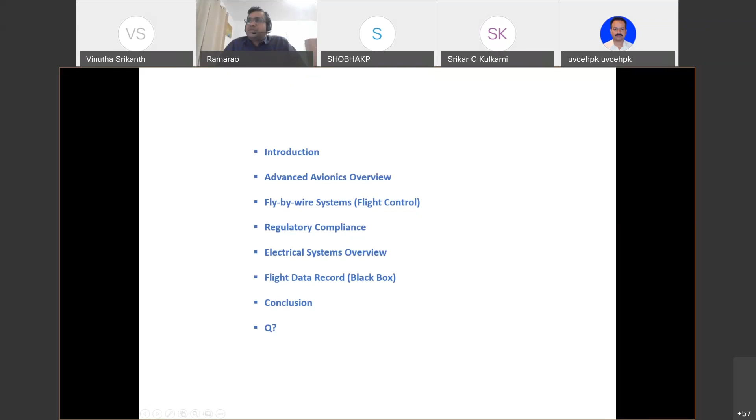Just I would like to introduce aerospace engineering, or flight. When I was supporting Boeing aircraft in the USA, whenever I entered the facility, I used to see the display board. I was curious what exactly was written on the display. I went and saw these words. I believe this will be self-explanatory with regards to the introduction to flight. So I would like to read it.

From prehistoric times, humans have watched the flight of birds and longed to imitate them, but lacked the power to do so. Logic dictated that if the small muscles of birds can lift them into the air and sustain them, then the larger muscles of humans should be able to duplicate the feat. No one knew about the intricate mesh of muscles, sinew, heart, breathing system, and devices not unlike wing flaps, variable camber, and spoilers of the modern airplane that enabled a bird to fly. Thousands of years and countless lives were lost in the attempts to fly like birds.

So as we know, we are all engineers. We need to develop a system in order to imitate the bird. It's very difficult for us to design an actual system, and we will face a lot of challenges. We have to bring down the real scenario and real requirements in the form of software and hardware. Just to bring a small piece of requirement to life, it takes a lot of challenges, and we have to put it on paper. A lot of logic is involved to bring up a huge complex system. An aircraft is a complex system, and it has subsystems.

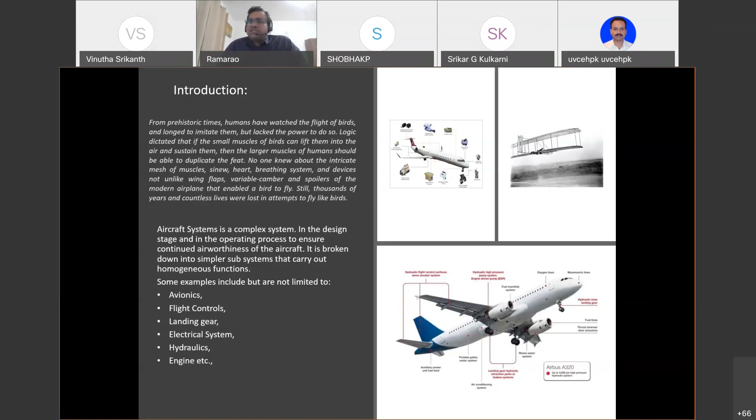If the aircraft is built in the US, we have to approach FAA regulations. So then I will move to the next slides. As I mentioned, avionics is one of the subsystems of the aircraft. As we know, advanced avionics systems can automatically perform many tasks that pilots and navigators previously did by hand.

If you go back to the 1940s and 1950s, we had a traditional way of instruments, where the pilot had to put 100% effort into navigation and the flight phases. But nowadays, with the extent of electronics and computer science, we have advanced so much that we are able to achieve the autopilot system in the aircraft. Where we have proper waypoints and plans, the flight itself will take over the automatic configuration, and it will provide less burden to the pilots.

So in order to avoid accident-prone errors, that is the motivation behind avionics subsystems. As we know, avionics are the electronic systems used on aircraft, and not only aircraft, but also artificial satellites and spacecraft.

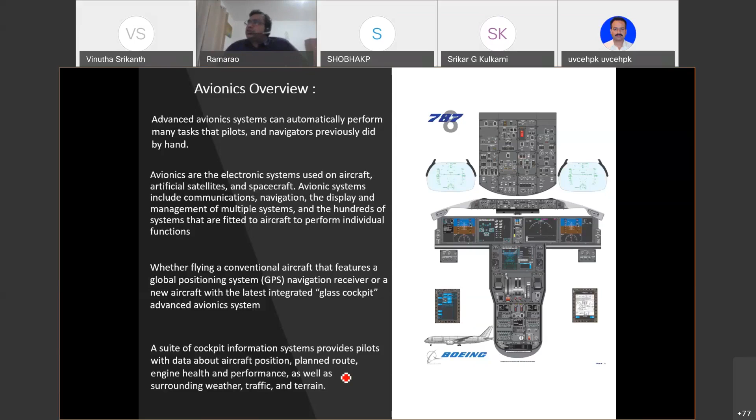As I mentioned, right now we have the capability of autopilot. Because of advanced avionics, we are able to achieve the autopilot concept in the aircraft. And not only in aircraft, right now we are seeing autonomous driving systems. Some of these things have been derived from the aerospace industry to the automotive industry.

The main heart of the avionics is the flight management system, FMS. So the FMS is the heart of the avionics. The FMS is integrated in the cockpit. We'll have two FMS.

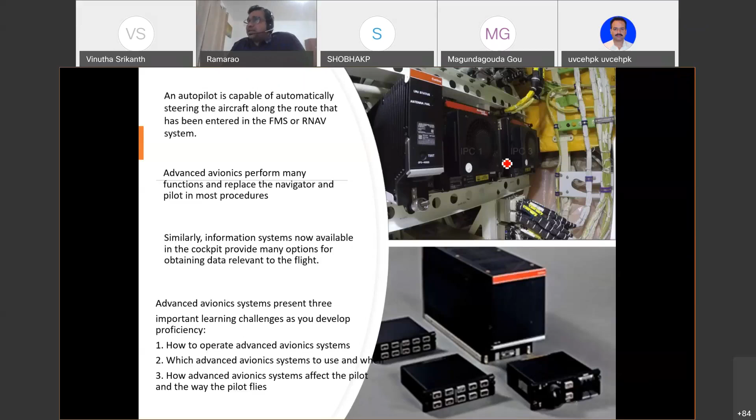As we have seen in the cockpit, we have flight instruments, digital flight instruments. As we know, we also have analog flight instruments. However we design the cockpit, we'll have all the digital flight instruments. Apart from that, in case we lose these flight instruments, we have redundancy, meaning we will have analog flight instruments also. So the pilot has to know how to read the analog signals. This is how we design it: in case we lose all these channels, the backup will be the analog instruments.

Coming to the primary flight display, PFD. The PFD is nothing but an advanced computer; it's an electronic flight instrument system available with advanced avionics. The right side is one example of a PFD. It is seated in the cockpit. We'll have a total of five PFDs or MFDs, depending on the aircraft configuration. A mid-size aircraft will have five PFDs, whereas a business aircraft will have three. All these are collectively wired and connected to the subsystems of the aircraft. And finally, take for example, we have actuators.

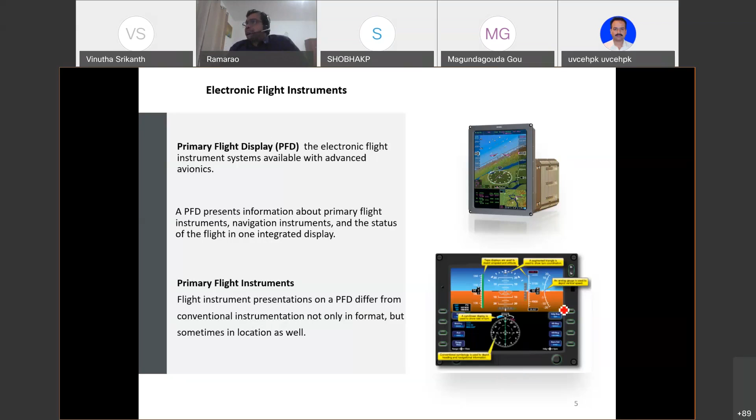So as we know, the primary flight instruments that appear on a PFD are driven by instrument sensor systems that are more sophisticated than conventional instrument systems. The attitude of the aircraft may be measured using microelectronic sensors that are more sensitive than traditional gyroscopic instruments. So these sensors measure pitch, roll, and yaw movements away from a known reference attitude.

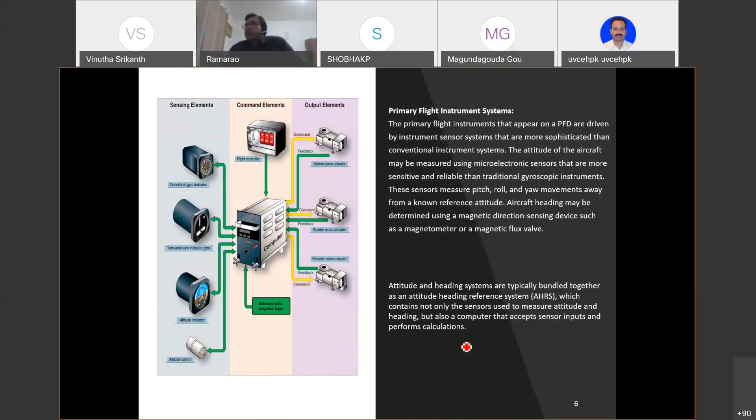So information on the altitude and airspeed is provided by the sensors that measure static and ram air pressure. And I believe we will have at least four air data probe sensors installed on the aircraft, in order to meet the redundancy principle. Suppose one ADSP probe is non-functional, then we'll have other ADSPs to take over the functionality. So that is the principle of redundancy systems.

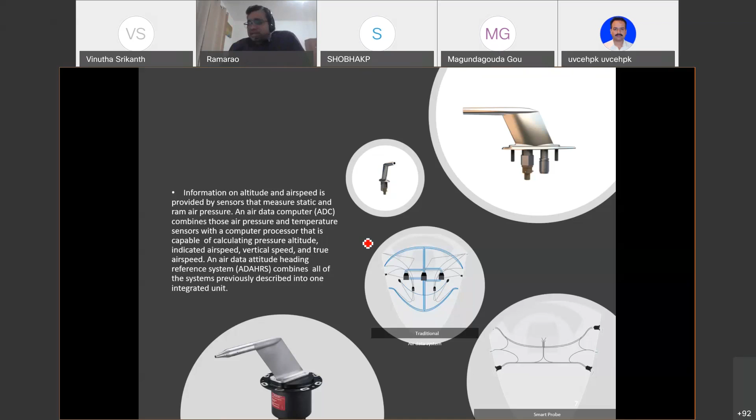As we see at the topmost right-hand side, we have two ADSP probes, and the middle one is the ice detection system. So as we know, the aircraft will fly around an altitude of 40,000 feet, where the atmospheric temperature will be around minus 50 degrees C.

So in order to have a proper condition, this ice detection system will sense every 250 milliseconds if any ice has been built up on the aircraft structure. So if it senses ice, then within a fraction of a second all the ice will be melted. So that is the functionality of the ice detection system, which is depicted in the center of the picture.

On the top and the bottom, those are ADSP probes, so air data sensor probes, which will sense the speed and the atmospheric temperature. Increase in air traffic, operating cost, and performance demands have made precision air data measurements necessary for safety, economy, and maximum performance. For example, if the aircraft is in Canada or US, especially during winter season, temperature will be around minus 30, minus 40 degrees C. In order to perform the flight operation, we need these systems for further process, otherwise it will be very difficult to move forward.

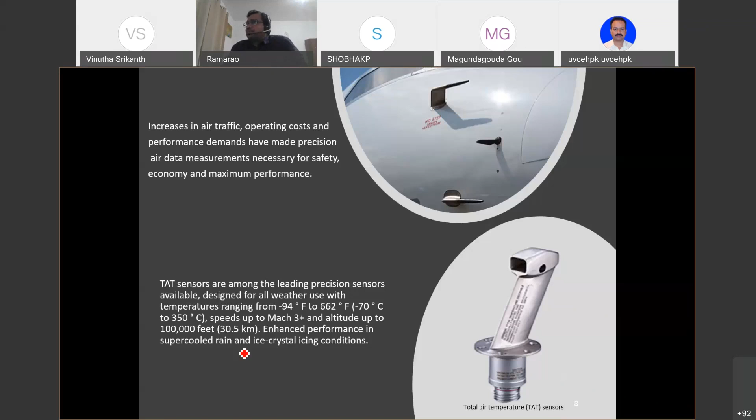I have concluded with the avionics. Now I will move to the next subsystem, fly-by-wire system, which is electrical flight control. As you see on the left hand side, early conventional aircraft used to use wires for navigation purpose, for the flight path. But nowadays, because of advanced technologies, we have fly-by-wire systems, that is electrical flight control, where we can control the flight through electrical technology.

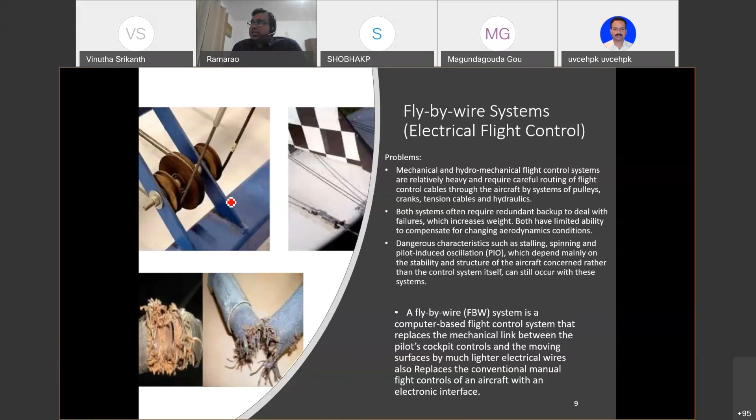I will move to the next slide. Now let's see the advantages of fly-by-wire, or electrical flight control. We have very good flight envelope protection, then stability and handling qualities are very good, especially weight reduction, that is one of the major factors, and maintenance reduction, as I mentioned.

We will have a lot of wires, and we don't know which wire has gone bad, it's very difficult for us to investigate which wire has broken. So it takes a long time in terms of maintenance, which electrical flight control helps reduce, giving us maintenance reduction cost and also fuel efficiency. If we reduce the burden of the aircraft weight, we ultimately achieve fuel efficiency. Then we'll have higher stability and some other advantages.

So then what are the effects? The effects of the traditional system are increased weight of the aircraft system, increased complexity, so obviously if the aircraft is more complex, it's very hard for us to understand the systems, then less survivability, and fuel inefficiency. These are some of the effects which the traditional mechanical hydromechanical flight control system has.

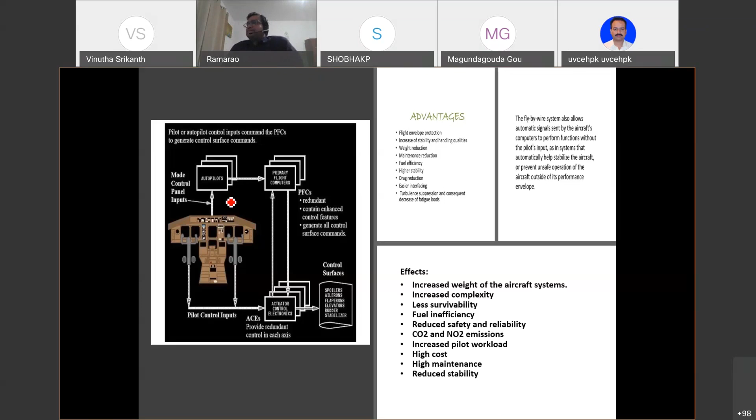So all these subsystems are controlled by fly-by-wire through electrical means of communication. The first electrical flight control system, fly-by-wire, for a civil aircraft was designed by Aerospatiale and installed on the Concorde. This was the first aircraft installed with this flight control system.

The first generation of electrical flight control system with digital technology appeared on several civil aircraft at the start of the 1980s. I believe after 1980s there was tremendous growth and improvement toward flight control systems, and later on the flight control system evolved into many versions. Right now we have quite matured flight control systems on the entire fleet of aircraft.

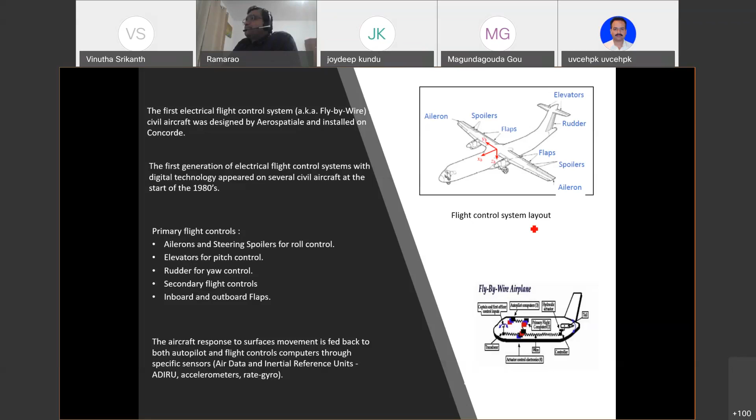So then, how do we design the systems considering failure and dependability? If the system has a failure, what is our backup? I believe we need dependability as well. The flight control systems are built to very stringent dependability requirements, both in terms of safety and availability.

In terms of the criticality level of the component, software and hardware are classified by whether the system belongs to DAL A, DAL B, DAL C, or DAL D, meaning design assurance level. If a subsystem comes under DAL A, that's called catastrophic - if there's a failure, there would be major loss of the aircraft. So during design and development we have to follow very stringent requirements.

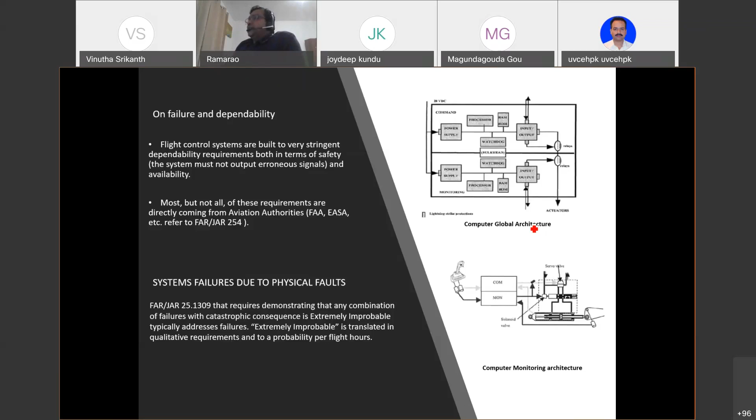Moving to the next slide, as I mentioned, redundancy again. Currently I'm working on electrical systems, and in our system we have a minimum of around six redundancies. So suppose if one system has a malfunction, then I will have a backup - at least four backups. That is the level of redundancy in the subsystems of aircraft.

Especially when talking about redundancy for flight control, the redundancy aspect is handled at system level - collectively we'll have the system level redundancies. When it comes to failure detection, typically the computer runs its own self-test and tests its peripherals during power up of the aircraft, and therefore at least once a day.

We take for example, we have a RAT, a ram air turbine, for the electrical system where it generates 12 kVA during the emergency. But I do believe that from 1970 till now, we've never actually used the RAT - that emergency power supply. So suppose you're not using it, then we the system engineer need to design in such a way that no matter what happens we're covered.

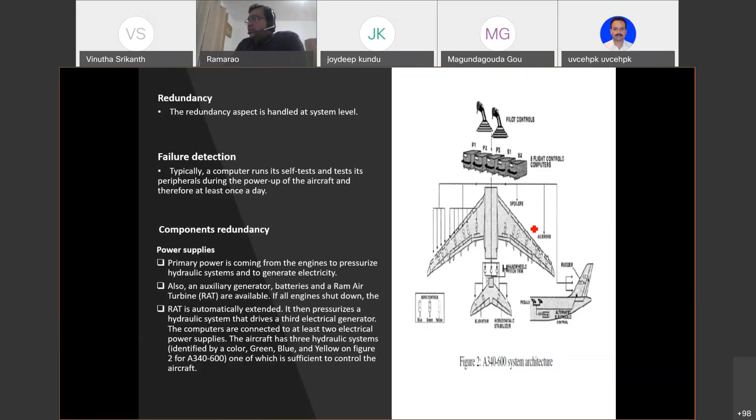I'll move to the next slide. Then again, while designing, we have to consider error avoidance. Aviation guidelines are applied with the highest level of development assurance level, as I mentioned, DAL level A, which is catastrophic. So we will have some set of rules or checklists - no matter what, we need to follow those checklists while designing the system. If it's a level A, it's a high level component, so if there is a system failure, there is a huge loss for the aircraft - you could say loss of death.

So in order to achieve level A competence, we need to follow DO178C for the software component and DO254 for the hardware component, and this is with respect to the subsystems. When we assume the aircraft itself as a system, then we will follow ARP 4754A for safety. That is the standard for the entire aircraft. Usually the manufacturers will follow 4754, whereas DO178C and DO254 will be followed by the OEM, vendor, or suppliers for the design and manufacturing.

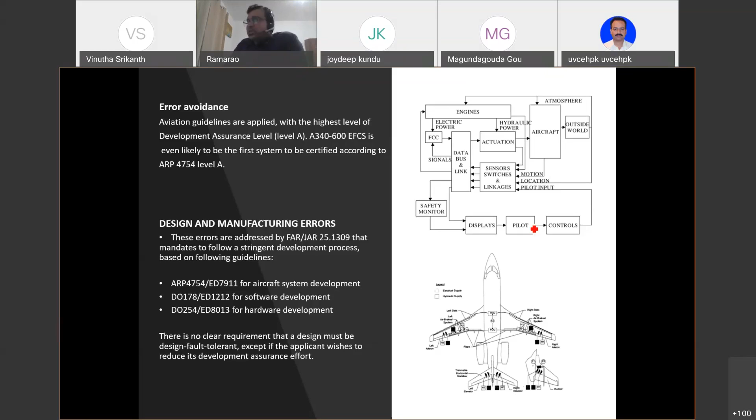So no matter what, we have to provide the proof, stating that, suppose our system is a complex system, we have taken care of all of the regulatory requirements. Yeah, I will move to the next slide. So there I have concluded the flight control principles and mechanism. Now I'm moving to the electrical system overview.

phase. So as we see the electrical loads, the right hand side is the forward electrical load where the power receptacles will be. In order to power the aircraft, we have different modes of operation. We can power the aircraft through batteries. We have 2 lithium ion batteries, so in an emergency we will power the aircraft.

Otherwise, usually we will power the aircraft through the ground cart, which has 115 volt AC power. So those are the power receptacles. Directly we can connect to the aircraft and power the aircraft. I believe we have seen those ground carts in the airport terminals.

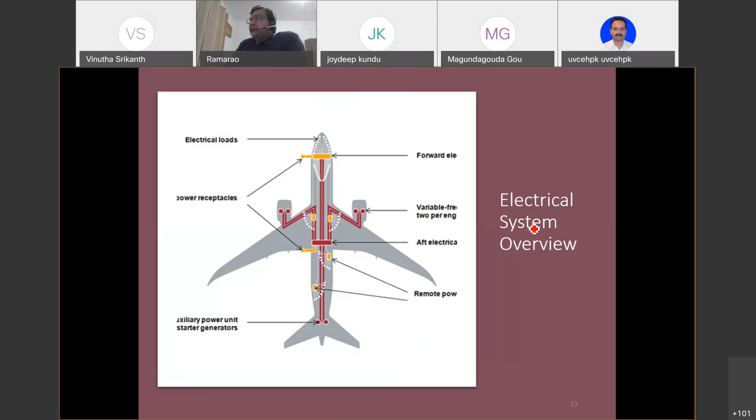And we have the APU, auxiliary power unit, with a dedicated GCU to control the APU. This is the overall electrical system overview. And I will move to the next slide, taken as a reference from the 787 electrical system architecture.

So as we see in the 787 electrical system architecture, the traditional airplane has one generator on each of the two main engines and one generator on the auxiliary power unit. Power feeders run from the generator to the front electrical equipment bay.

Take the 787 Dreamliner. We have 2 generators on each engine and 2 generators on the auxiliary power unit, so totally we have six generators on the aircraft. Power feeders run from the generators to the aft electrical equipment bay. We have dedicated power panels; I believe totally around 8 power panels will be installed in the mid and aft bays.

In order to take the control, we have at least 17 small electrical substations that provide power to the local loads. As I mentioned, we'll have CDCs, cabinet distribution centers. So at least we'll have 17 CDCs on each aircraft.

So what are the benefits? I believe the total length of heavy gauge power feeders is less. All this is in order to reduce the weight of the aircraft. That is the main reason, the main goal. If you reduce the aircraft weight, I do believe we'll have better power consumption and efficiency. That is the main goal behind all this.

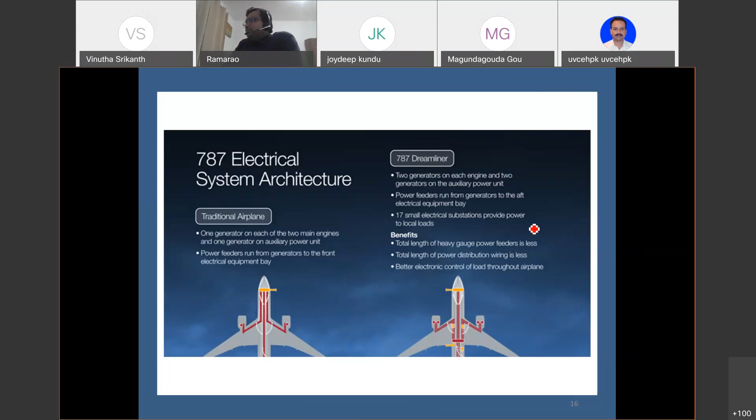So just in order to show how exactly it looks, these are pictures from the multifunction displays, MFDs, in the cockpit, showing how the pictorial representation will look. I have shown these two pictures. The left picture is the electrical synoptic display.

Basically, as a system engineer, suppose we have an issue on the aircraft, how will I proceed? Initially I will get the information from the technicians: what the configuration is, whether the aircraft is in battery mode or electrical mode, or whether it's at the ground station. First we take the information, then the first line of contact is the display. We need to get the data from the display, meaning OMS, onboard maintenance system data.

As I stated initially, the advanced avionics subsystems will collect all the information from each subsystem. I believe every 250 milliseconds we'll have the data on the display. If we populate that particular subsystem, we have designated ATA chapters. For each subsystem we have an ATA chapter: for electrical system 24 and avionics 25, like that it has been designated.

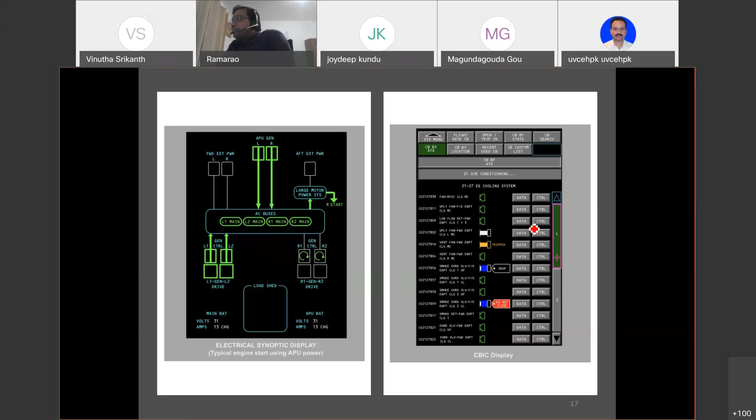This is the single line architecture from Google, taken from the internet. So this is not dedicated to any aircraft configuration, just to see how the architecture looks with respect to the electrical system. As we see in the single line diagram, we have the left channel, the right channel, and the center channel. That's the way we will divide the aircraft.

The left channel is the left generators, the right channel is the right generator. Left generator means the left engine, right generators means the right engine. So the generators are coupled, integrated with the engines. We'll have the engines from GE, Rolls-Royce, or Pratt and Whitney, depending on the configuration.

Broadly, it has been classified into three stages. One is AC power stages, then we will have essential buses, and DC power. As I mentioned, in the aircraft the subsystems will have AC or DC loads. Then we need to provide a proper path for the subsystems.

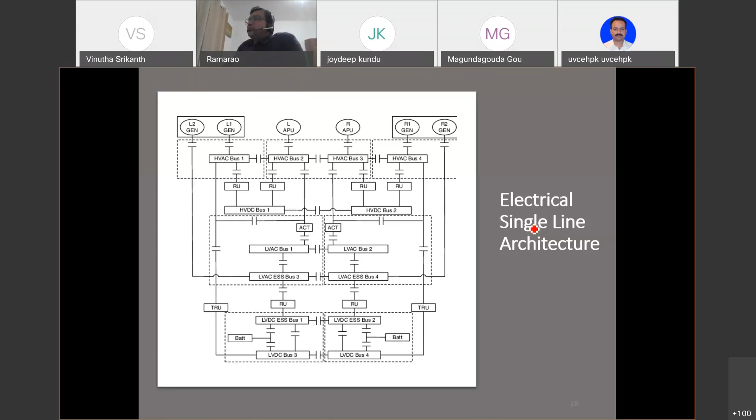Yesterday Prasanna sir told me, Ram, it is better to include the black box in your presentation. Everybody knows the black box. Initially the first thought will be that the black box will look black. But no, the black box is actually orange. Black boxes are a group of data collection devices mounted in the tail of an aircraft. If you see the picture on the bottom right, that's where the black box is fitted in the tail.

Collectively we have two boxes. One is the flight data recorder, FDR. Another is the cockpit voice recorder, CVR. These two boxes are collectively called the black box, which is orange in color. Why orange? So we can easily locate the box. That's the reason we have given the orange color, in order to find it properly.

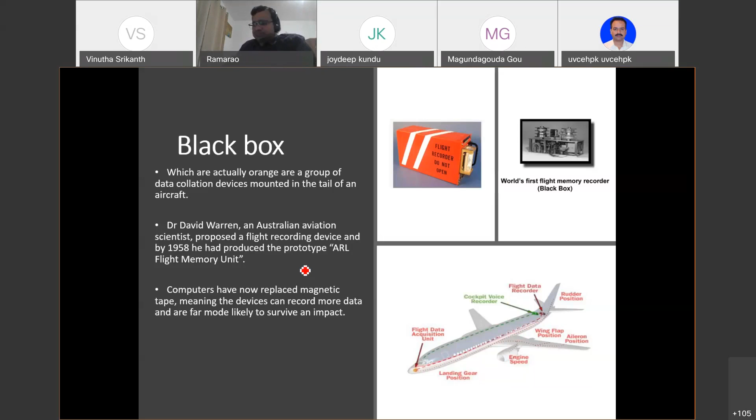Now let's see the generations of the data recorders. As I said, the FDR was invented in 1958, and at that time we had the first generation of foil recorders; the data used to be recorded on foil. The second generation recorded flight data through tape recorders. Now we are in the third generation, that is, solid state recorders.

As you see, the left unit is the cockpit voice recorder. As I said, the black box consists of one CVR, cockpit voice recorder, and one flight data recorder. Each aircraft should have these two units, fitted in the tail. The FDR records all the critical parameters, whereas the cockpit voice recorder records the flight crew conversation for at least 2 hours.

The right side picture shows the inside of the solid state recorder, how it looks if we take the unit apart. We have the aircraft interface board. As I said, all the data will be collected through this aircraft interface board from the avionics units. Then you see we have high temperature insulation.

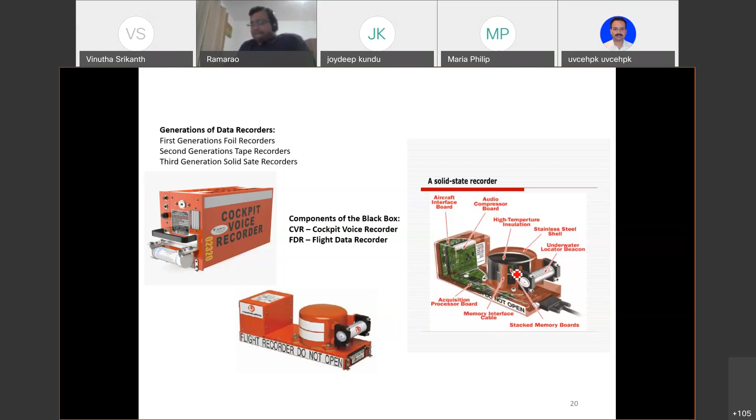As for the modern data recorder, currently the recorders are made of strong materials such as titanium and insulated to withstand a crash impact many times the force of gravity. Because, as we imagine, suppose the aircraft falls to the ground from such a high altitude and high pressure, no matter what, the unit has to withstand that impact. I believe the temperature will be around 1000 degrees C for up to 30 minutes, and the immense pressure of lying on the seabed.

Usually, as we have seen in scenarios, flight crashes happen in the middle of the ocean. Suppose it happens, then with the wreckage it's highly impossible for us to locate the flight data recorder. So the FDR will have an ELT, emergency locator transmitter. The functionality of the ELT is it will transmit and provide the location of the unit.

It will have a lifespan of 30 days. It has an inbuilt lithium ion battery, so I believe it will have only 30 days of power. After 30 days, we lose the box, and then it's highly difficult for us to search for the black box. So, black box recorder after a flight crash.

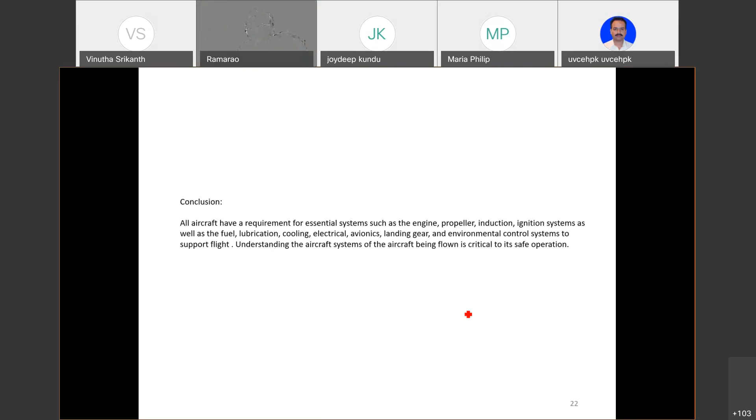Understanding the systems of the aircraft being flown is critical to its safe operation. Our ultimate aim is to achieve safe operation for the entire flight duration. This is the ultimate goal in the aerospace aircraft domain. And these are all the references I have taken in the preparation of the presentation.

Thank you. Any questions? Thank you, Rao. Questions are there. Hello. Yes. One question.

If there is a sudden reduced altitude of the aircraft during emergency, produced power is gradually reducing by the RAT, with potential risk of overloading the ram air turbine and stored emergency supply like batteries. How is such a condition tackled? Initially, our first source is generators. Then the second source will be the battery backup. I believe we have a lithium ion battery with the capacity to power the critical subsystems of the aircraft for at least 30 minutes. So the pilot will have at least 30 minutes to go for a safe landing.

As I mentioned, we have a bus power controller. That unit will decide the aircraft is in emergency mode, so we have to take out some of the loads. We only keep the critical units; for example, entertainment systems will be turned off, because they are not needed and not considered critical units. Then we'll have at least 25 minutes of power, which is enough to relocate to the safest place.